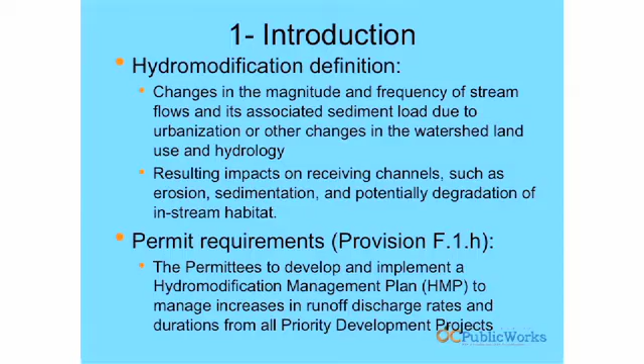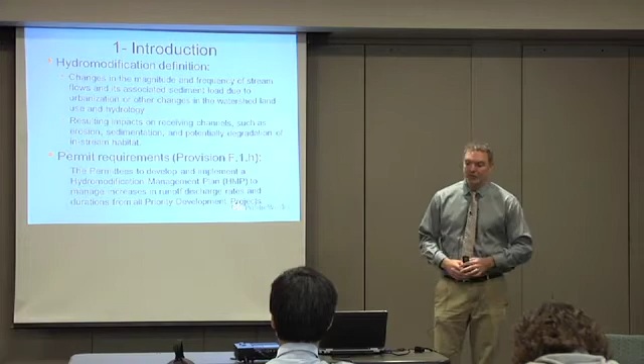So what is hydromodification? It is really the changes in the magnitude and frequency of stream flows, associated with increases in impervious surfaces. Based on these increases due to urbanization, we're seeing changes in the hydrology of a watershed, affecting the downstream receiving waters. So what we're seeing is erosion, sedimentation, and potentially degradation of in-stream habitat. Within the permit, there is a requirement to develop a hydromodification management plan to help manage these increases in runoff discharge rates and durations from priority development projects.

So the primary causes we're seeing from hydromodification are really based on land use changes within a watershed. The effects we're seeing are a change in site water balance - less water being infiltrated into the soil, more water running off that particular site. We're changing both the surface and near-surface runoff, the interflow in the shallow groundwater, and we're also changing the groundwater recharge in that area. One thing not really thought of much with hydromodification is that it's not just a matter of changing the hydrology, but also changing the sediment load, delivery, and transport of that sediment, which also affects downstream receiving waters.

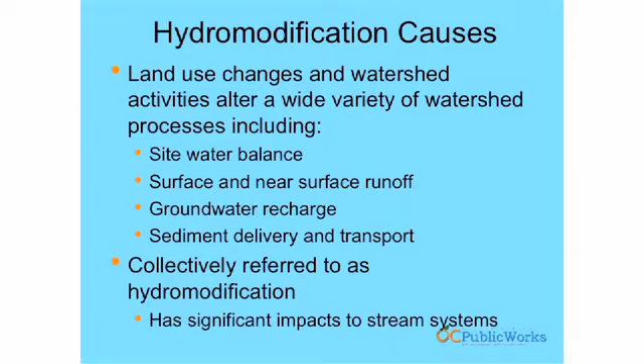Collectively, this is referred to as hydromodification, and we are seeing significant impacts to downstream receiving waters based on those conversions of impervious surfaces.

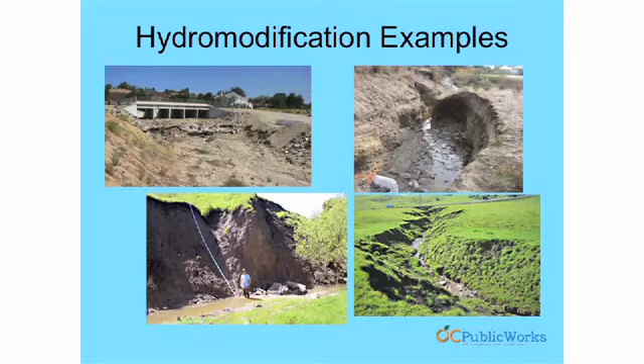So a little bit about how we developed the HMP. All 13 South County permittees were involved in its development. We developed an HMP work group and had 3 meetings with that work group to develop the HMP. We went through identifying what hydromodification is, looking at the permit specifically for what we needed to develop in the HMP, and then we developed a document, taking into consideration that it needs to be developer friendly and easy to use. It needs to be that way not only for developers but also for plan check staff, so they can easily understand the criteria and how it's to be implemented on development sites.

We also developed, which we'll go through in a lot more detail this afternoon, a model that will help in actually meeting the criteria and helping developers size BMPs to meet that criteria, as well as plan checkers to be able to review if a development site is in compliance.

So a little bit about the timeline and development of the HMP. After we went through and developed the HMP through these workshops, we developed a first draft and submitted it in December of 2011. The regional board reviewed the document.

They provided a comment letter in April of 2012. That letter primarily focused on the technical aspects of the HMP. It reviewed essentially the exemptions that we proposed. It didn't agree with some of the exemptions. Some of the exemptions it identified that we needed to make changes, and others it just didn't comment on altogether. The one it didn't comment on was the larger exemption.

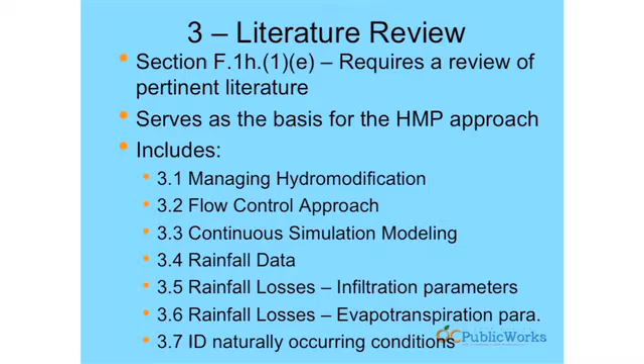That literature review includes sections on how to manage hydromodification, looking at a couple different approaches: the flow control approach, and also using continuous simulation modeling, which is a requirement of the permit. We also looked at the appropriate rainfall data, the losses we'd see from rainfall in natural conditions based on infiltration and evapotranspiration. We also wanted to look at what are the natural conditions, because the standard within the permit requires us to mimic those natural conditions for a set frequency of storms. That's critical to understand - we're not just looking at pre-project conditions on what's existing on a particular site for redevelopment projects, but what would have been the natural conditions for that site.

Section 4, between Section 4 and 5, is really the meat of the document. This is where we go through the criteria, the applicability requirements, and all the exemptions. We go through alternative compliance. We have a tiered set of requirements. And then we also identify some of the hydrologic management measures - what are the BMPs that can help you meet the criteria. So this is really where we get into the meat of what needs to happen for priority development projects.

So the criteria: within the permit, there was a requirement to use continuous simulation. Based on our literature review, we identified the criteria as essentially being that post-project runoff flow rates and durations do not exceed pre-development, naturally occurring pre-development flow rates, for essentially 10% of the 2-year up to the 10-year event. Those are the storms that really affect hydromodification. Storms larger than that aren't having much effect, but it's these smaller, more frequent storm events causing downstream impacts in receiving waters. As mentioned before, the South Orange County hydrology model was identified and developed as a tool to help PDPs meet this criteria.

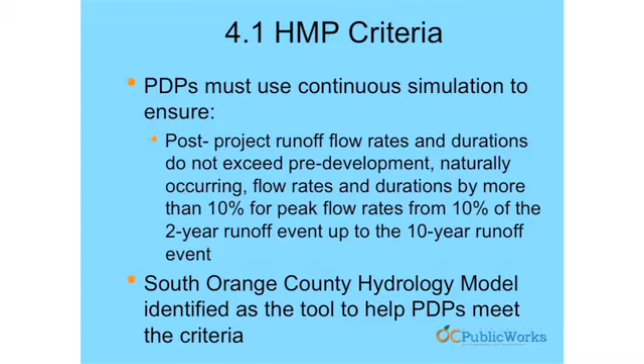I'm going to go through a couple of the exemptions - you'll notice in parentheses we have 'proposed' in red, because this is something we're still negotiating with the regional board. One of the exemptions we proposed was engineered channels. We propose this exemption because the channels engineered within South County are designed to convey the 10-year event at full build-out. So we wanted to find a nexus of what streams are really being impacted. If they're engineered and designed for that 10-year event, there really should be no impacts from all the storms up to that 10-year event.

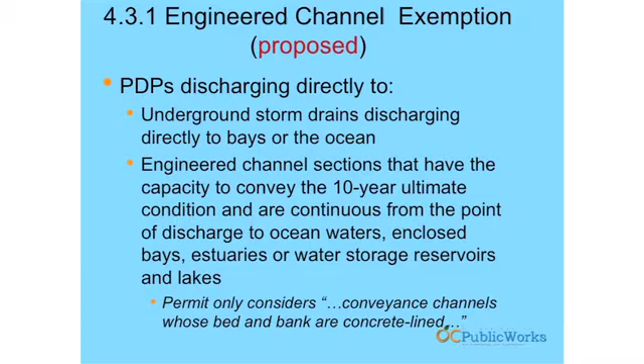So there's really no sense in having priority development projects implement on-site controls if there's no effect from implementing those controls on-site. The idea here is that any priority development projects that discharge into engineered channels that have the ability to convey those hydromod storms up to the 10-year event really should not have to implement on-site hydromodification controls.

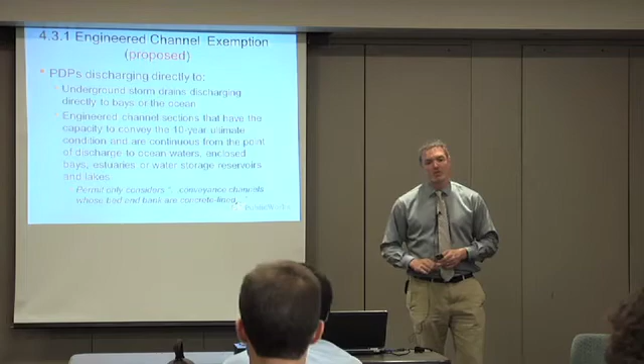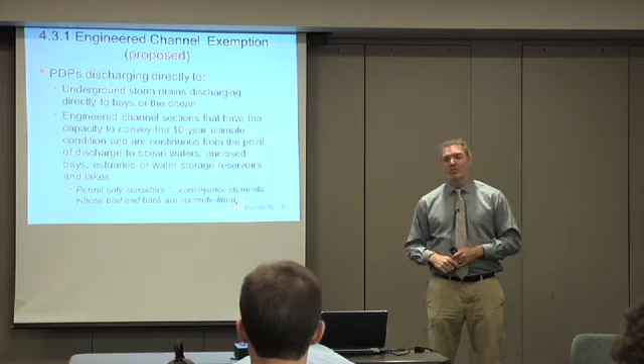This is something we've gotten pushback from the regional board on - they're saying the permit only allows conveyance channels that are concrete-lined, bed and bank, from the point of discharge all the way either to the ocean, estuaries, or bays. We don't agree with this. We feel if it's an engineered channel designed for that, there's really no need to implement on-site hydromodification controls. The regional board's response is that maybe in the future there'd be a way to take out that engineering and try to restore the channels to a natural condition. In some places that might be possible, but I'd say the vast majority of places in South Orange County it's not possible, because there's development within the floodplain. Those channels were designed as flood control channels primarily to protect public safety and property.

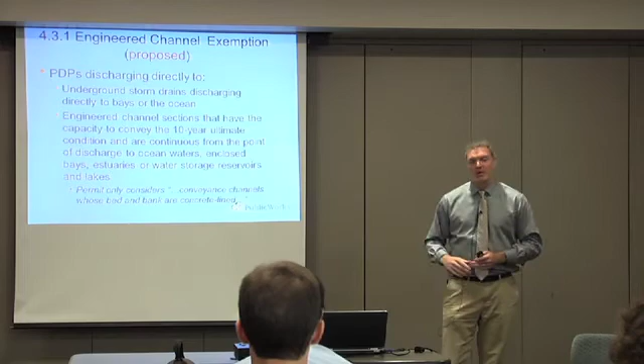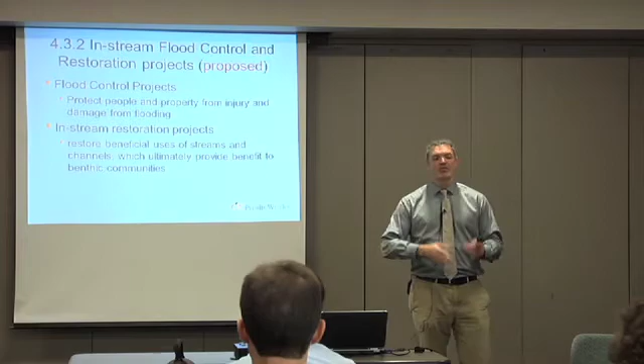One of the other exemptions that we proposed was in-stream flood control and restoration projects. Flood control projects themselves are designed to protect people and property, so there shouldn't be another layer of requirements to try to meet a hydromodification control standard when they're really designed to prevent flooding in the first place. We felt it would be very hard to implement hydromodification controls for these projects because they're actually working in the channel. Unless you have right-of-way adjacent to that channel, it'd be nearly impossible to meet this criteria, which would prevent these projects from going forward, and they're important to protect public safety and property.

The other one is in-stream restoration projects. The idea with these projects is to help meet the whole intent of the hydromodification management plan, which is to try to restore some of these channels. So there shouldn't be another layer of requirements put on these projects. They should be categorically exempt. Once they go in, there's no other requirements they need to meet. They're really designed to help meet and restore some of the beneficial uses of those receiving waters.

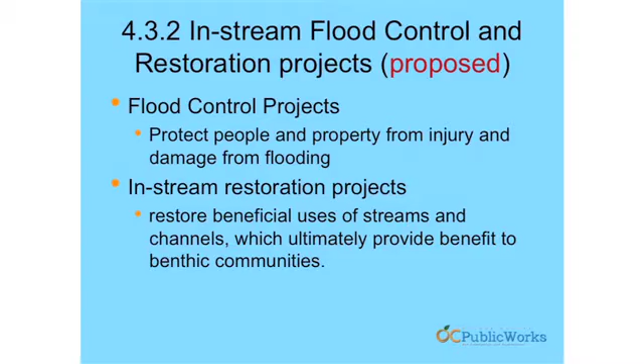The third, and probably one of the most important exemptions, is the large river reaches. The idea here is that with larger rivers, there's not as much impact on those stream reaches from the small amount of detention or on-site hydromodification control measures. Those large river reaches, as larger storms come through, essentially reset. You get a large amount of sediment moving about, so the small impacts you'd see on those receiving waters from smaller storms essentially get reset with the larger storms.

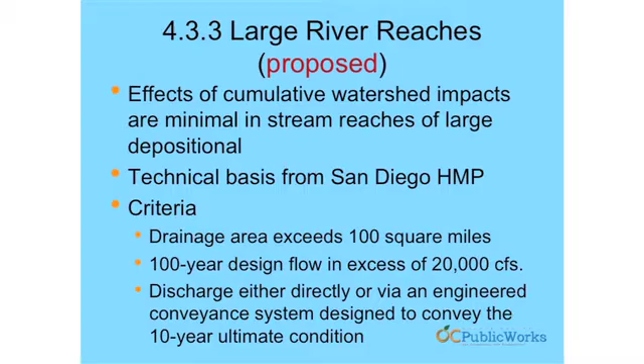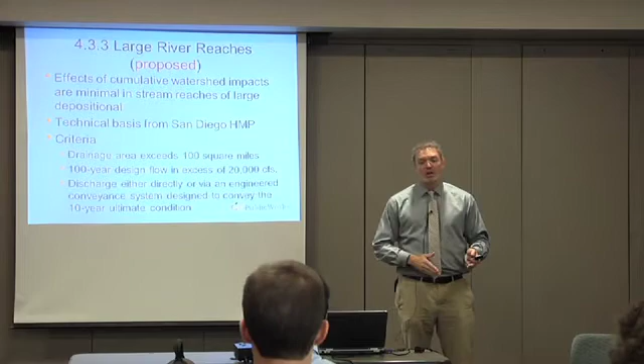We based this technical argument on some analysis that was done for the San Diego HMP. Essentially, the criteria is that for drainage areas that exceed 100 square miles, and the 100-year design flow within that large river reach is greater than 20,000 CFS, then any priority development projects that discharge to those larger reaches meeting this criteria would be exempt. Again, there's very little impact on the receiving water from those smaller hydromodification storms on these large river reaches.

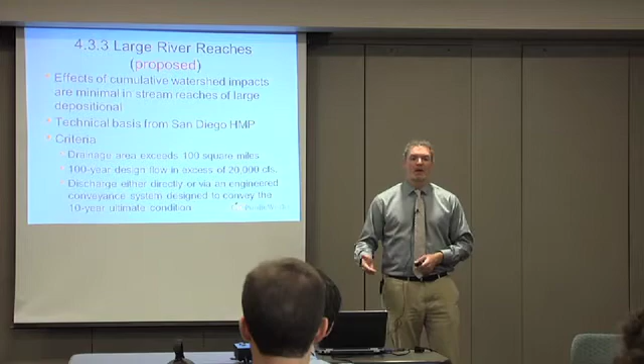The regional board didn't comment on this exemption in their first letter. In the second letter, they said you don't have the ability to propose an additional exemption, so they're not commenting on the technical merits, just on the ability within the HMP to propose additional exemptions. The other criteria is that it has to be discharged from a priority development project directly to this large river, or through a conveyance that is designed and engineered to convey the full 10-year build-out capacity.

Section 4.4 of the HMP deals with alternative compliance. Similar to the LID alternative compliance, if you're subject to hydromodification but cannot meet the criteria on site, there are a couple different steps you can take. The first option is off-site mitigation, and there are two options within off-site mitigation.

The first step is you would go and do an on-site technical feasibility study, identifying why you cannot meet that hydromodification control criteria on-site. You submit that with the preliminary WQMP, identifying the results of SOCHM showing you've tried everything, integrated your hydrologic source controls and LID site designs, and with all of that you still cannot meet the criteria on site. So you're identifying that it's infeasible to meet it on site.

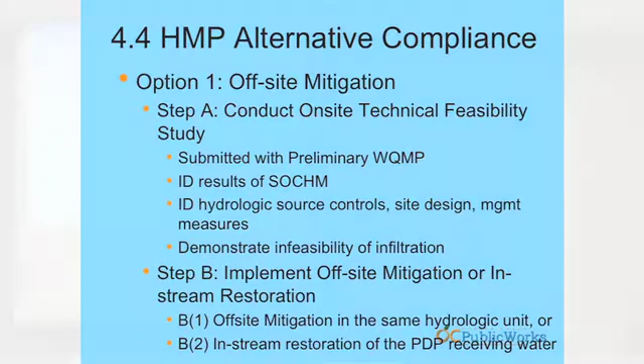Once you've done that and coordinated with the jurisdiction, you have the ability to implement an off-site mitigation or in-stream restoration project. With off-site mitigation, you're looking to implement a project to meet the hydrologic criteria for your site, essentially creating a detention basin or some other hydrologic control elsewhere within your same hydrologic unit.

Or you have the ability to implement an in-stream restoration project, but it has to be implemented in the receiving waters of your priority development project. This gets a little bit more complicated—there's a whole lot more layers of permitting that goes on, but we do want to leave it open as an opportunity, and the regional board essentially wants to see restoration of those receiving waters. So the receiving water your project discharges into, although it has to have impacts from hydromodification to have this option available to you.

The second overall option for alternative compliance is if the jurisdiction that the priority development project is in has developed what's called a jurisdictional HMP mitigation bank, then a priority development project can pay into that bank. Now, this is only available if that co-permittee has developed such a bank. In coordination with a lot of the South County permittees, this is something they don't want to touch with a 10-foot pole—it gets complicated, you have to put money up front and start building projects and so forth. There's a couple permittees interested in potentially putting this together, but again, this option is only available if it's developed by that co-permittee.

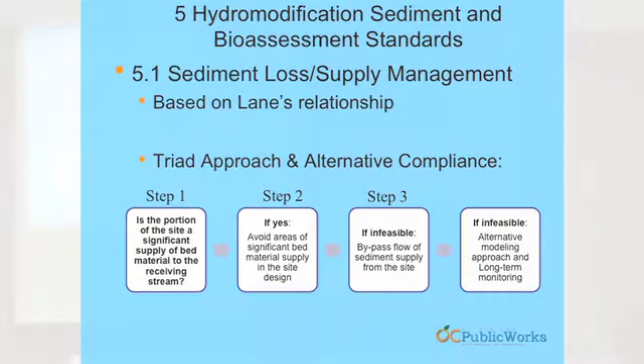Step two is you need to try to avoid those sources of sediment on your development site. Now, what does this mean for priority development projects? It means the days of mass grading are essentially over, at least as we know it now. There still might be some mass grading, but only for sites where sediment really isn't a source. So what you're trying to do is protect your first and second order streams on site if you've identified that the site is really a source of sediment within the receiving water. So you're looking at, can you avoid those impacts on site?

And then, if that's infeasible, there's an option to bypass your flow and sediment supply from your site. That gets more complicated because you might have to recreate a stream on site, and the science of that isn't that great right now. So if your site is a source of sediment, you'll need to look at avoiding those impacts from your site—that's the best way.

Now, if you look at all three steps and it's still infeasible, the development site has the option to develop an alternative modeling approach to show that that particular development site is truly not a source of sediment on site. That gets a little more involved, and we'll go into more detail this afternoon.

What's the likelihood of a development not being a sediment source? It really depends on that particular area in the watershed. It's going to be really on a case-by-case basis.

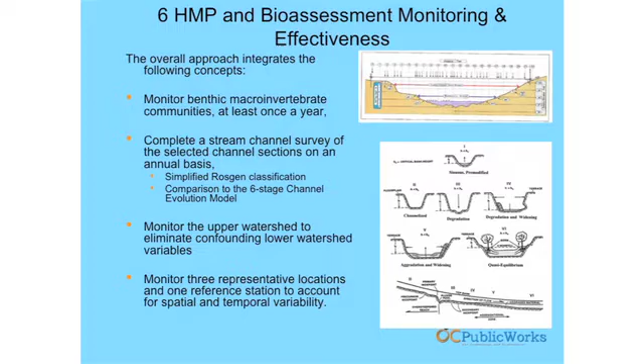We're also looking at doing channel surveys, identifying - and this will take time to understand, because channels don't change on a yearly basis unless we see large storm events. We're looking at channel sections over time to see what impacts we're seeing from development sites without controls versus development sites that have implemented the criteria. This will take time not only for the channel to show effects, but for development to move forward within the watershed implementing that criteria.

We're also looking at what the performance protocol would be. There would be BMP inspections per the model WQMP, making sure BMPs are properly maintained. There are also requirements within the permit to look at IBI scoring, looking at habitat, and if we see a rapid change in the channel morphology, what's the cause of that?

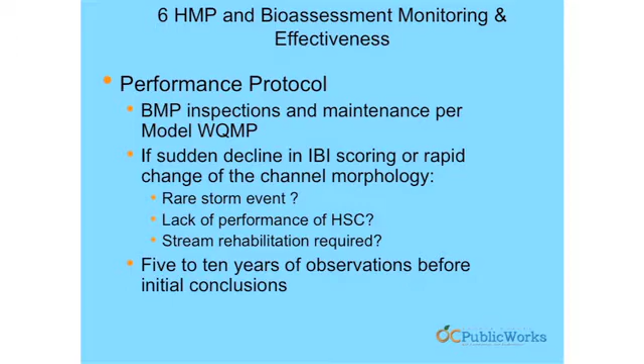Is this really a rare storm event? Is it lack of performance from the hydrologic source controls on site? Is the criteria really effective? Looking at all that information over time, we're looking at probably 5 to 10 years before we really understand if this criteria is being effective.

Section 7 talks about integration of the HMP into the model WQMP. Aaron talked a little bit about this, but until we have a finding of adequacy from the regional board on the HMP, we'll be in a waiting period where this won't be integrated into the model WQMP. Once we do have that finding of adequacy, it will get integrated, and there will be options to go through alternative compliance, meeting both the hydrologic and sediment criteria for priority development projects.

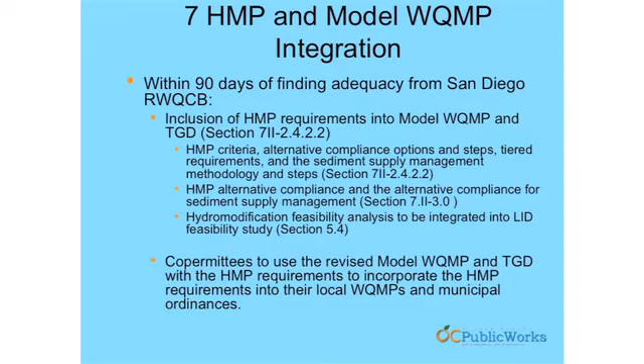So that letter they sent us didn't start the time? The what? That letter they sent us - they did, yeah. They sent a letter, and that's actually this letter here.

Essentially what's in the letter is they've provided comments, primarily on the exemptions that we suggested. They basically identify that we don't have the ability through the permit to propose any additional exemptions. They find an initial finding of adequacy within that letter, but we've had a couple meetings with the regional board already. We identified that essentially the one exemption we need included is the large river exemption, because in their April 25th, 2012 letter, they didn't comment on the large river exemption.

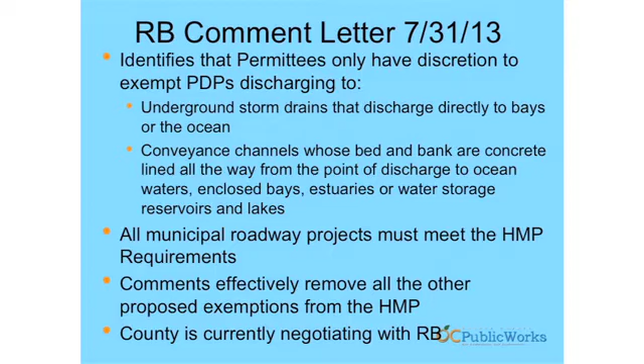They essentially said, go ahead and start implementing those portions of the HMP that will likely be in the final. With no comments on the large river exemption, priority development projects started using and relying upon that exemption. So to answer your question, we're not sure exactly if we have a finding of adequacy or not, because that letter is a little ambiguous on whether we're really allowed to move forward. That's why we're negotiating with them right now.

Right now we're kind of in a stalemate as far as whether the HMP is actually valid or not. If you look at the April 25th, 2012 letter, there are portions of the HMP that can move forward, but the July 31st, 2013 letter contradicts that - their letters themselves are contradicting. So I don't have a good answer for you on whether we're at a point where we can actually move forward with the HMP. I would say right now, we're probably not.

So the other important parts of the letter are that essentially all the exemptions we're proposing, the effects of the letter is removing all of those. So the only exemptions in place are the ones identified within the permit themselves, and those exemptions include...

discharges from PDPs directly via underground storm drains to bays or the ocean, or those projects that discharge into concrete lined channels, which have to be concrete lined all the way from the point of discharge to the ocean, bays, estuaries, or water storage reservoirs.

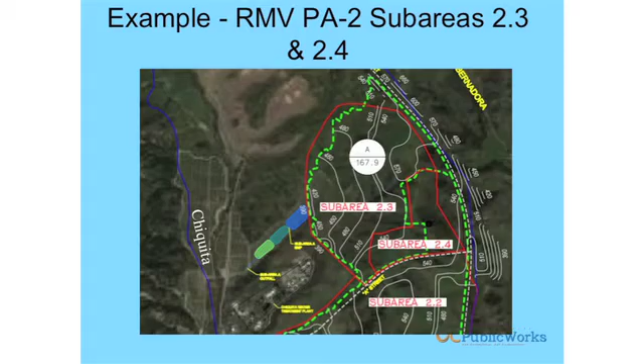Okay, real quick, just want to go through a quick example, and I won't go through this in detail because we're going to cover it more this afternoon. Just to give you an idea of how this affects the sizing of BMPs for development projects, we worked on a project close to here in Rancho Mission Viejo.

Essentially, we sized BMPs to meet the HMP criteria. What we did was look at how big the BMPs would be under the 2002 permit versus how big they would have to be under the fourth term permit, looking at both the LID requirement and the hydromodification requirement.

Essentially, this came out to the BMP under the 2009 permit having to be about 4 times the size of a BMP under the 2002 permit. So what this really means for development projects is setting aside a larger area of land to implement BMPs.

So really a significant effect on those development projects, which is another reason why these exemptions we're trying to get in there are so critical. The exemptions we put together are really based on those projects not really having an impact on the receiving waters, and that's why we're fighting very hard.

There has to really be a nexus to an impact to put requirements on development sites. And if there is no nexus of impacts, then there really shouldn't be a requirement.

We'll go through SOCHM a little bit more in detail this afternoon, but this is the model, available at ocwatersheds.com. This is available to development projects to use and size their BMPs. The idea is that you implement your source control and site design BMPs, and the model has the ability to do that.

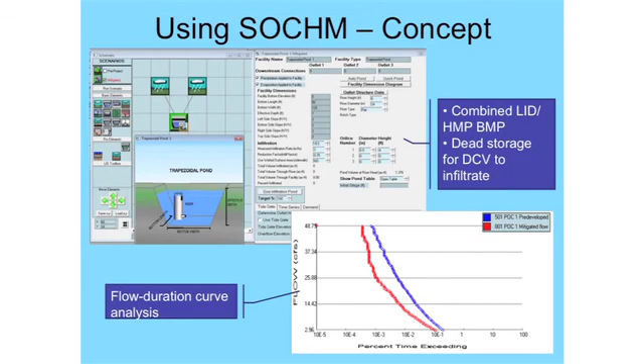Then you implement your treatment control BMPs, your retention BMPs, and the idea is you want to get your mitigated flow to be less than your pre-development flow. Again, the model guidance and the reviewer checklist are available online. With that, I'll take any questions.